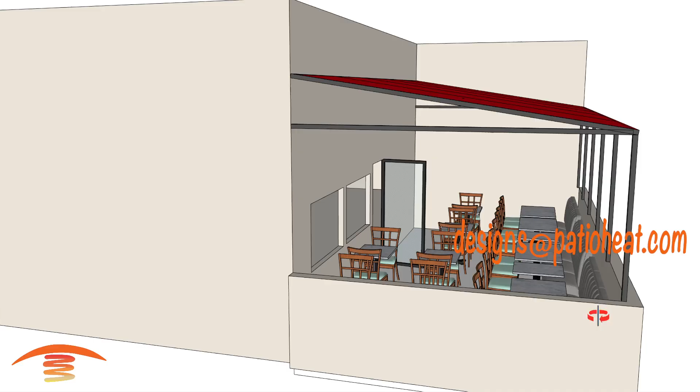Okay, so the previous video we made has the electric heaters installed. Now we're going to show what the gas heaters would look like in this particular project. So let's go back into those overall dimensions that I have. Overall dimensions, I have this section here at 28 feet, this section here on the inside edge of this wall here to 13 feet. I have this height here of 12 feet to the awning structure up here.

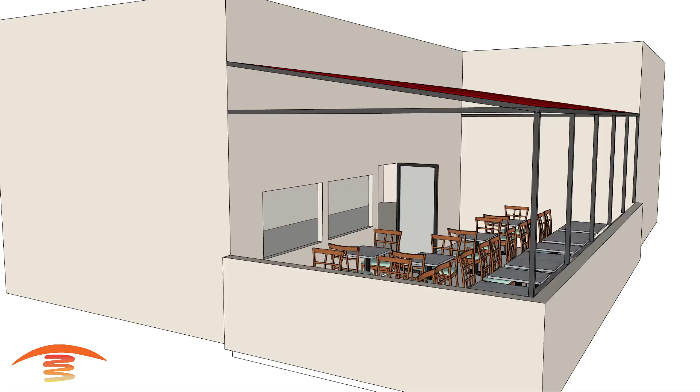And then on this side here, I have that at 10 feet off the finished floor to the bottom edge of the awning itself. That's about it for right now. Let's go ahead and turn this off and check out what options might work for this particular project. So I'm going to first show an option with 3 units like this.

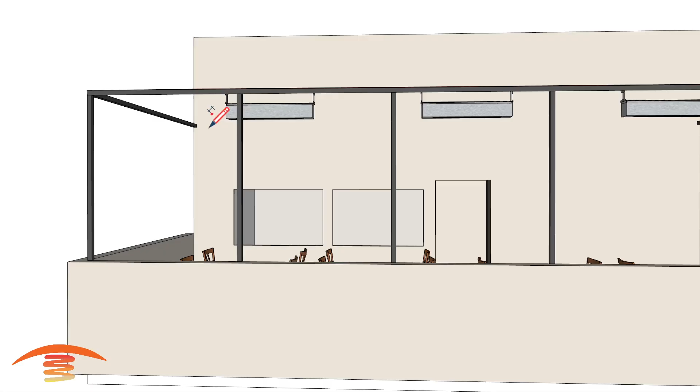So these units here are all S25 models, and those S25 models, I have this centered within the patio structure, and I believe this is roughly about 6 feet. Let me just double check on that. Let's see if I can grab the center point here, and we'll go to here, and yeah, actually 9 feet center to center. Let's go ahead and swap that out and look at the footprint.

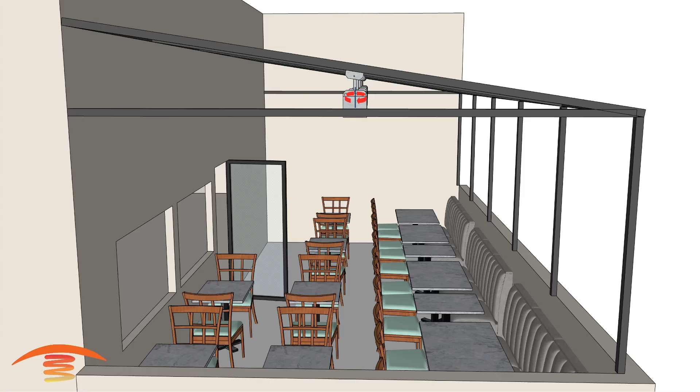But first of all, I should mention that the clearance on an S25 model is 9 inches of clearance to any combustible surface above the heater itself. And let's go ahead and just pull this down slightly, and let me move this up here. So essentially what we have is from this point here, the lower edge of the awning, from this point up has to be a minimum of 9 inches of clearance.

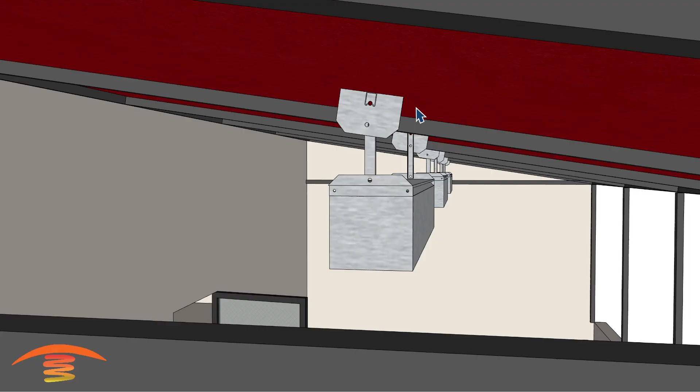What I've done here is I've taken the OEM bracket that comes with the heater, and I have placed the bracket going parallel with the awning structure. Obviously there's nowhere to connect to this awning structure, but if you were to somehow utilize some kind of steel that comes across, something of that nature that's 6 inches wide, then this is how you would do it, and change the actual angle of the bracket itself. So from this point here, you would go from a flat surface to an angled surface.

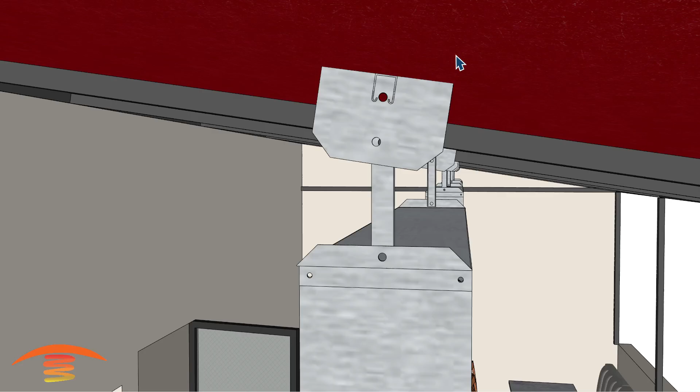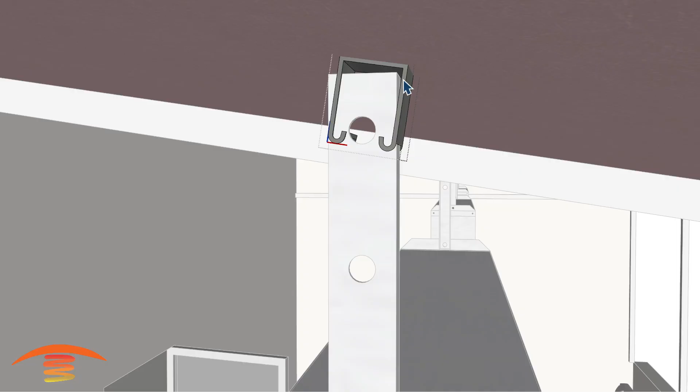However, this is not what I would recommend for this particular bracket. I would probably just remove these brackets and then use something known as unistrut or something of that nature that can actually be installed. Let's see if I can show how that would be installed in each section. So if I was to pull this out here, you can see that that unistrut would be something that you could mount within this span here.

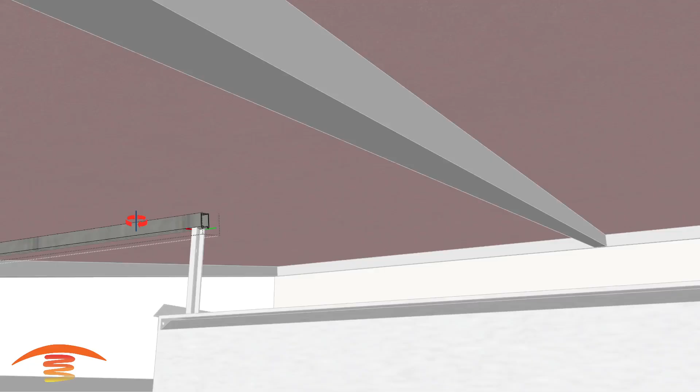And let me go ahead and see if I can get in here closely, and we'll bring it in here. And obviously, yeah, so you take some unistrut and put those unistrut pieces, let's see if I can hit this here.

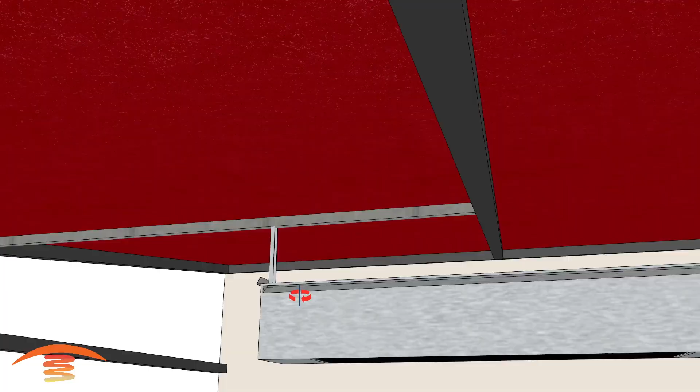So that unistrut would come across something like this. And then you can use an L bracket here instead of the OEM bracket that I showed just a minute ago. But again, making sure that you are maintaining that 6 inches of clearance above the heater on this particular side, lower side of the awning structure itself. So that would be how that would look.

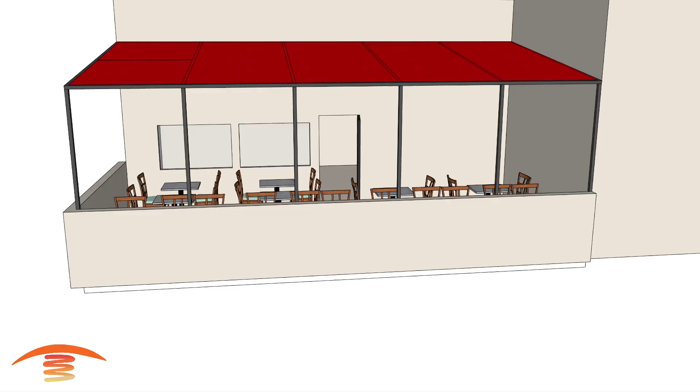And now let's go ahead and look at how that footprint of heat would look with just 3 units here. Would that be enough? Let's go ahead and turn that array on, and you can see here that we're covering the area fairly decently. It's not 100% covered. You can see that this inside edge over here, as well as the outer area over here, and I do have these centered within this span from left to right here.

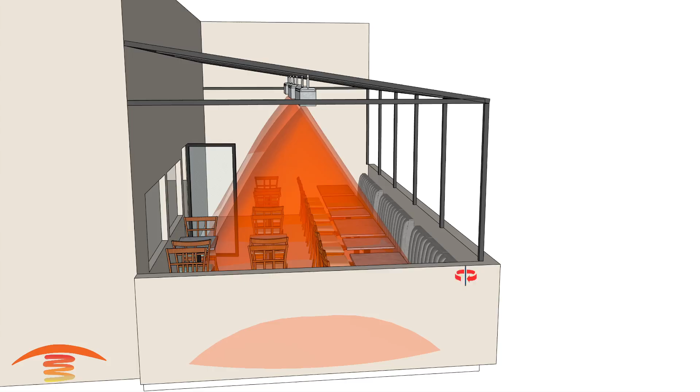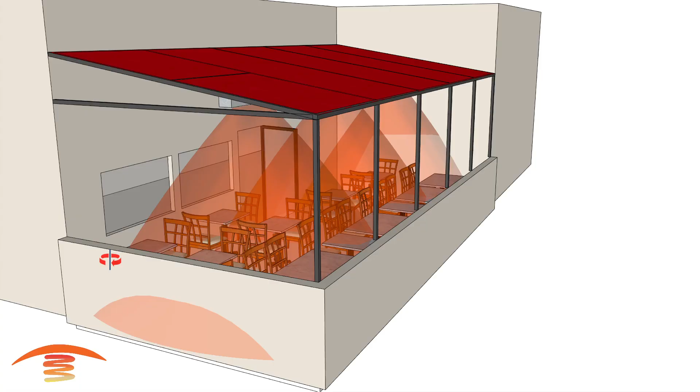We're not 100% heated. However, if you were to have some sort of drop down shade or screen sections on the 2 sides that are open, then you could maintain some of that warmth in there. And as people sit down, you know, the human body puts out heat as well. And with that covered section, if these were all covered, then this might be something sufficient for this particular project.

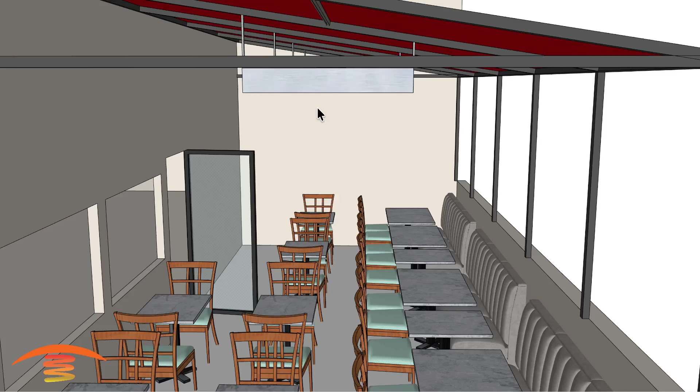Now I'm going to go ahead and show what another option would look like. So I'm going to go ahead and turn that off, and then show what an option like this would look like, going now parallel with this section here. And by the way, the Sunpak unit is a 4-foot long unit, so 48 inches from this point here to this point over here. And also the heater itself is 8 inches wide, so from this point here to this point here, 8 inches, and then 8 inches tall.

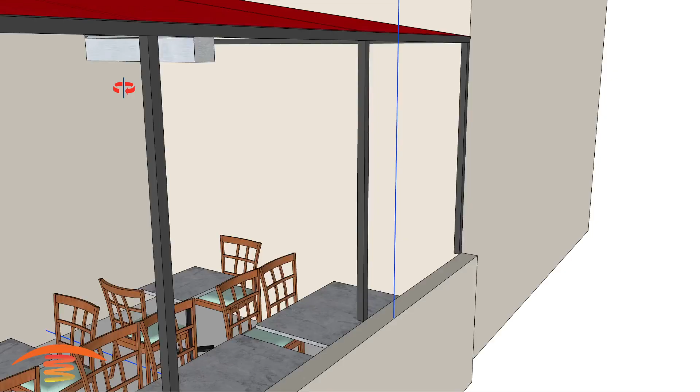On an S25, and again, this is specifically dealing with S25 models here, you would need that 6 inches of clearance on the low side again, so you'd have to make sure that this low edge here is 6 inches of clearance just below the combustible awning structure itself. So that 6 inches has to be from the awning material, not the frame, but the awning material itself.

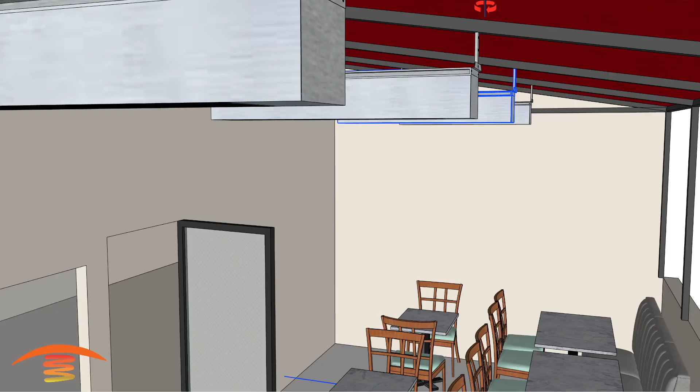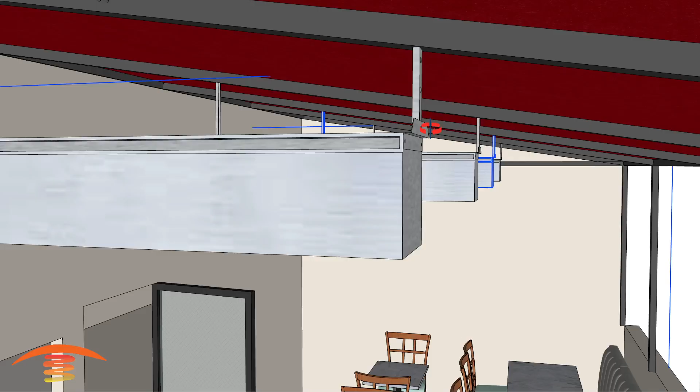So you could cut these support posts or beams here, and then either use a 45 or 90 degree elbow, something of that nature to connect it, or it could be welded depending on how you want to do that. But definitely I would like to have this straight down so it doesn't look like it's at an angle, and then you can connect it to the actual OEM bracket that comes with the heater itself right here.

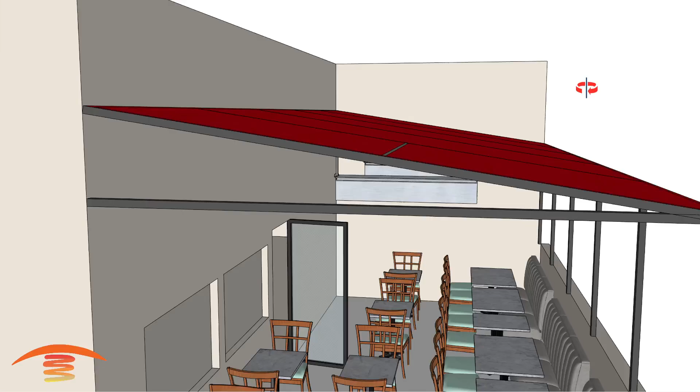So let's go ahead and look at the footprint of heat with this. Oh, and by the way, these are centered within that span again. So from this point here to this point here, the inside edge of the wall, we're at the center point of the heater itself. So let's go ahead and look at the footprint of heat. Let me go ahead and turn that on. So this would be the footprint of heat, and I'd like to move this over here a little bit, kind of take a look at this layout here.

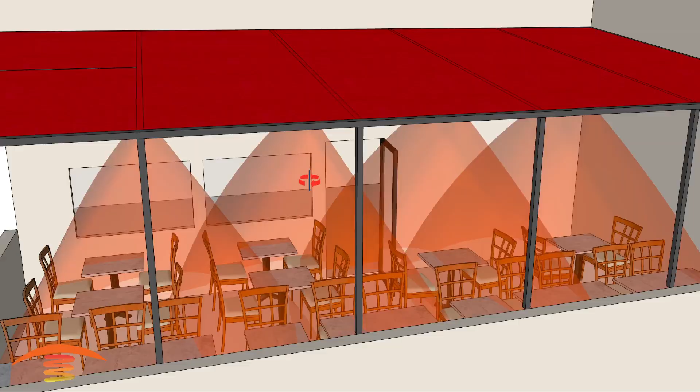Now you can see this layout here, and I have these heaters mounted on each one of these cross members from here, here, here, and here. I think that would be a really good output of heat utilizing these 4 units. And let's go ahead and just turn this all the way up here and take off the awning material here for a moment to take a look at that. But yeah, you can see that this would be a very good output for these units themselves.

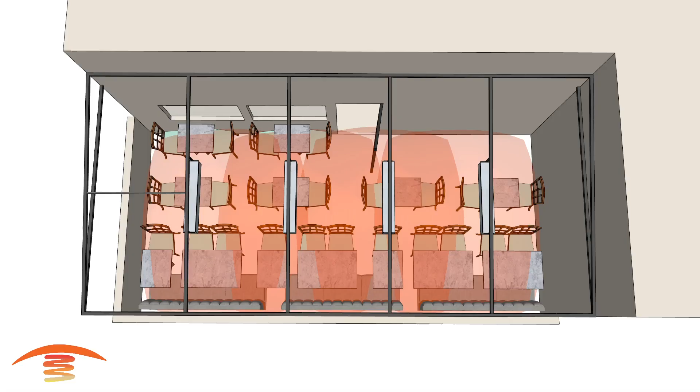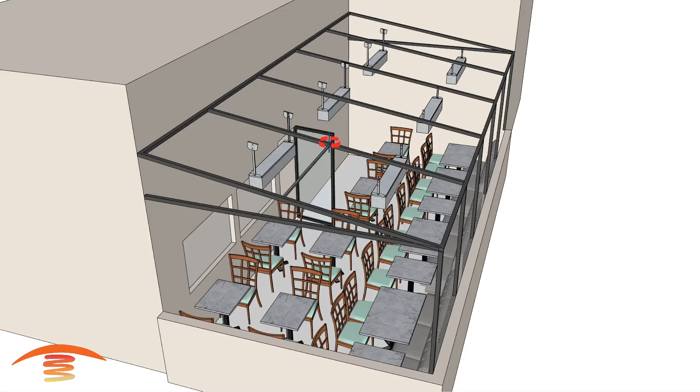So alright, that would be a second choice, and then here would be the third choice, which would be utilizing possibly 6 units. And I'm going to go ahead and leave that awning material off, and we'll take a look at what I've done here. So here, what I've done is made these center point to center point at 6 feet center to center, and then mounted it similar to what I was talking about before, using some unistrut or something of that nature to go across this whole section here, and then mount the actual bracket itself here.

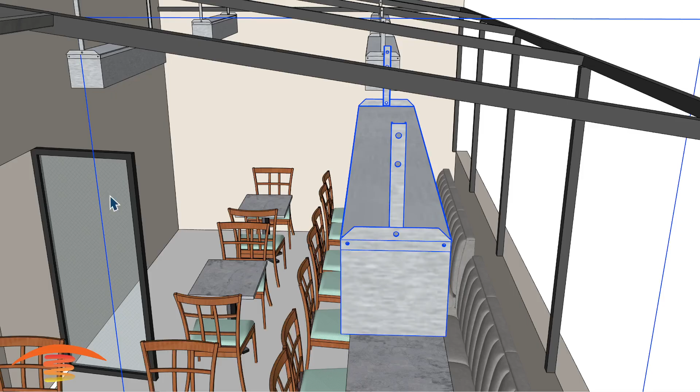Also, you can see that I utilized the 9 inches of clearance from this point here, let me just get my arrow here, from this point here up to the awning material. And then these units themselves, I went ahead and just made it so that the bottom edge of the heater is at the same elevation as the bottom edge of these heaters here. So I think I might even have that, let's see if I can pull that up here real quick.

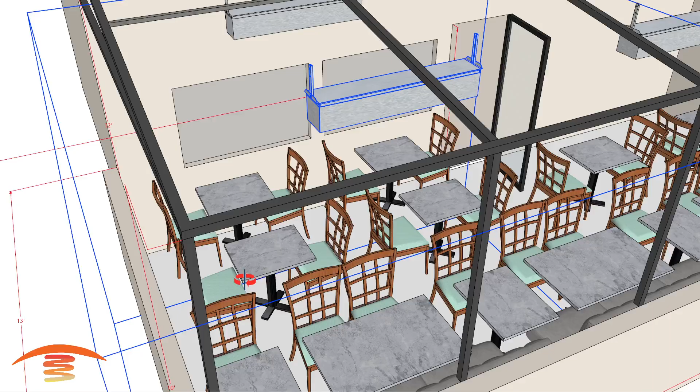This is the actual dimensions. I think this is actually the one for the center units that I had just shown a minute ago. Yeah, so these are a little bit higher. So the true mounting edge for this particular project here, if I went to the bottom edge here, came out... Let's see if I can do that again. Sorry for the delay on that. I think this is actually it right here. But let me just delete that for a minute.

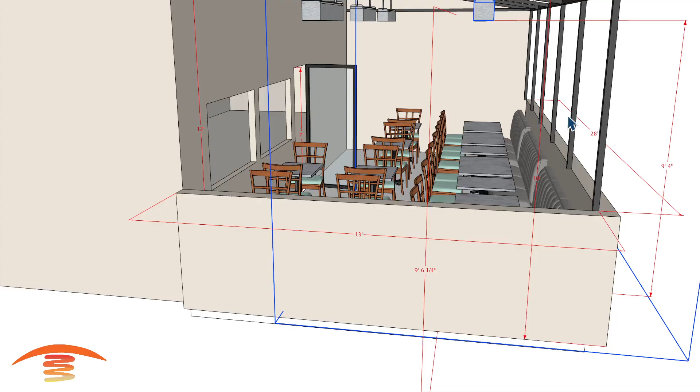Yeah, so there we have it at 9'4" on an S25. A 9'4" is typically not the best height. It'd probably be better if it was like 8 feet off the floor. But if we're utilizing 6 units like this, I would say this is fairly decent, pretty good actually, because of the amount of coverage that we're going to get, the infrared light waves that we're going to get. Also, it gives a little bit better view. You're not really going to be looking at the heater as much.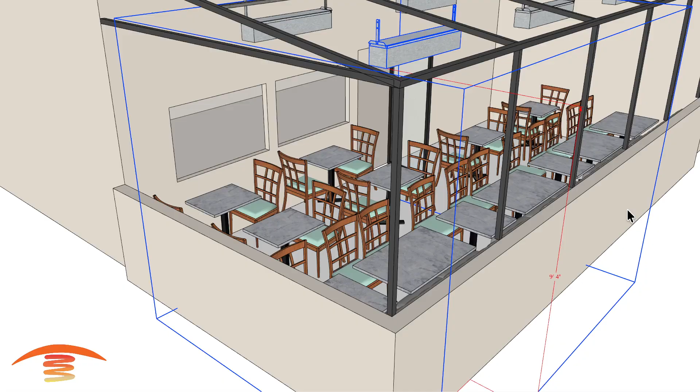And I'm going to turn off these dimensions here. Also, as I stated before, if these sections are covered at different times of the season, you're not going to need as much heat at all. So you don't need the higher output S34 model in something like this. Now I also want to state something else. I'm not sure whether this section over here on this awning is actually going to be enclosed.

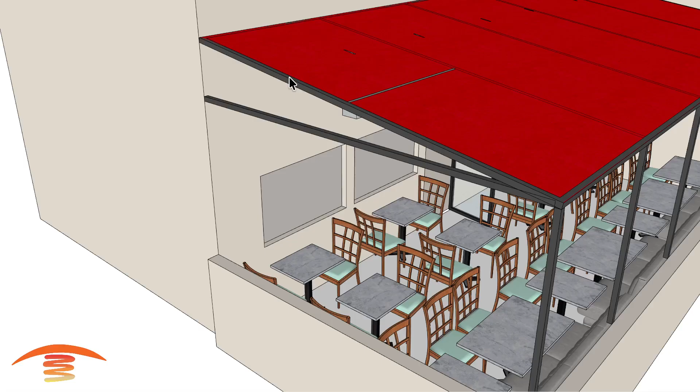So let's put the awning material back on here. Let's just say that this section is enclosed with this red awning material. Then you definitely want to make sure that it's vented here, because if you don't have it vented, the exhaust gases will build up below the awning itself, and that would cause a lot of issues down the road. So if you had just a vent open here that allowed the exhaust to flow out from the awning, then you're going to have a longer lasting awning, and you won't have other issues with lights, speakers, things of that nature. So that's something else to think about.

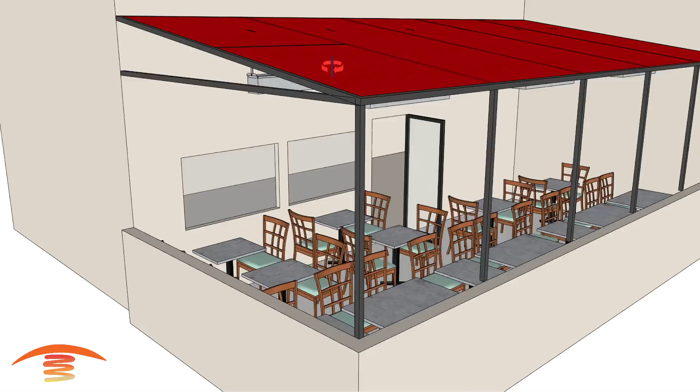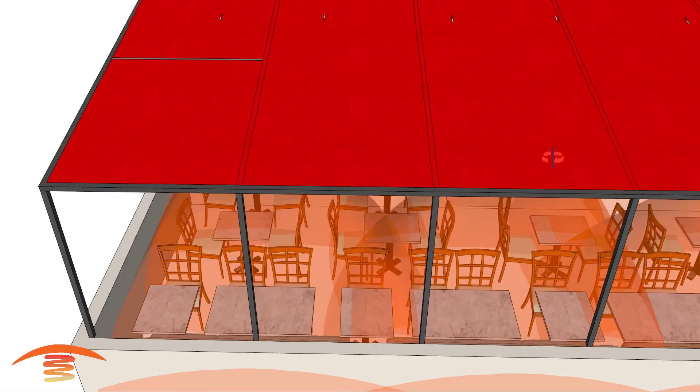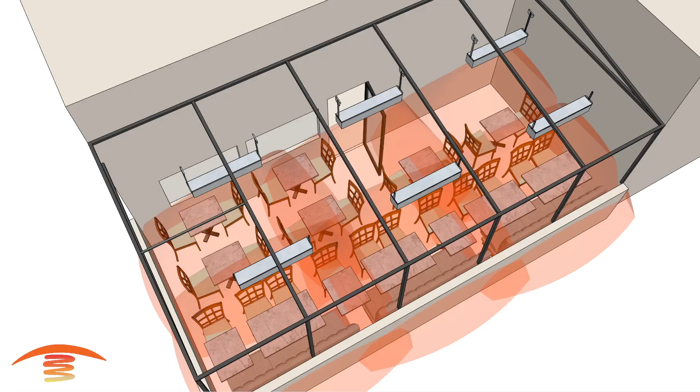But let's go ahead and show that footprint of heat, and you can see that footprint of heat is really, really good. Again, we're heating up the whole entire patio structure. Let's take off the awning again and move this around, and you can see that we're heating up the whole entire space here very decently. So I would say this is the best application right here, and the second best would be utilizing the other units, the 4 units in this fashion here. And then of course this would be pretty decent, but not 100% coverage. So I think that's about it.